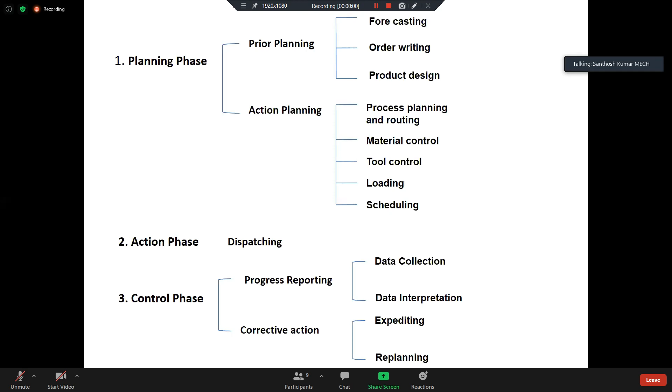In industry or service sector, after forecasting or prior planning, the next stage is action. After planning, we go for action based upon planning schedules. How action planning starts, how it's going, how we monitor it, and how schedules proceed as per the work - all those things we see in action plan. In that process, planning and routing after starting, work is allocated to particular departments, and we check if it's cyclically moving properly or not. In routing stage, we see material control based upon material movement according to department requirements - whether material is moving properly or not. All those things we see in control stage, along with tool control, loading, scheduling, and it works accordingly according to the action plan.

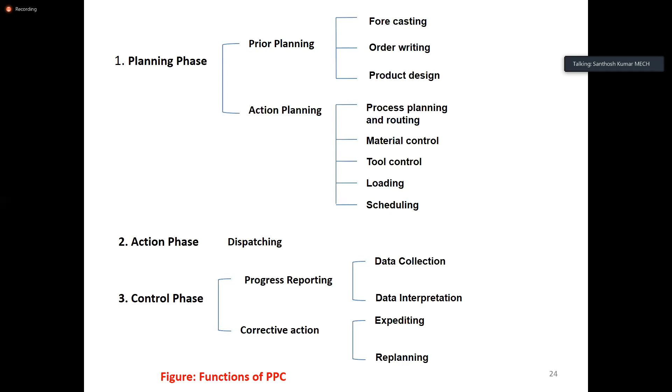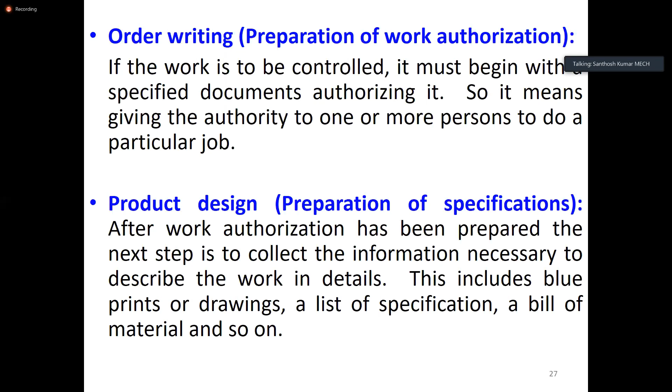Now we'll discuss the second and third phases - action phase and control phase. In action phase, the work is started. There is only one production planning activity in action phase, that is dispatching. The main work starts from here. Till now, whatever we planned, everything is virtual - in the first phase, everything is virtual. It's not exactly starting production, but in action phase, it will start exact manufacturing, either in manufacturing sector or service sector. So proper practical work starts from action plan.

In a nutshell, the only outcome is dispatching - starting from planning to dispatching, whether we are going to deliver a particular product or service to the customer. That is dispatch. So dispatching is the transition from the planning phase to action phase. It consists of actual release of detailed work authorization to the work centers. Once our planning is completed, it goes to higher management.

The planning will be done by different departments. As I discussed in the last class, material procurement department and receiving department - in manufacturing department, again we have different departments, for example if you take any factory.

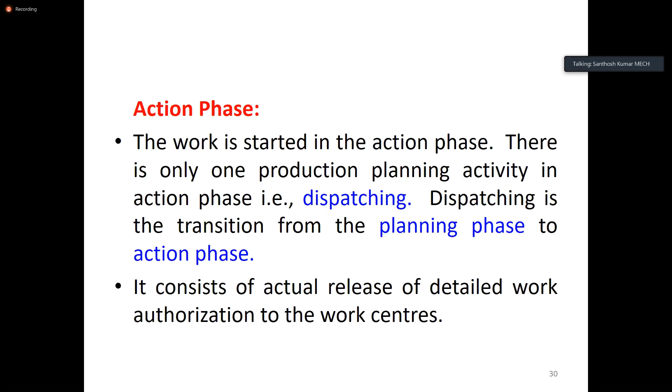In the hierarchy, like factory manager or CEO - chief executive, or sorry, chief operating officer, that's called COO. CEO is different, COO is different. The COO's role is to execute plans according to factory needs. CEO is different - he will be the direct contact to the end customer and factory, that's why he's executive, CEO. So the role here is, CEO is very important when it starts to action phase.

Follow-up or control phase - once the work is started in an activity, it is necessary to continuously evaluate the progress in terms of plan, so the deviation can be detected and corrected as quickly as possible.

When we plan something, we don't think any obstacle will come, we don't do those kinds of calculations - we just calculate according to our methods. So, okay, this fabrication can be done within 6 hours. And for this, they won't generally account for shutdown time or any damage happening - for that I need to keep some extra time. They just simply keep, okay, loading for this job on the machine is 5 minutes, machining can be done within half an hour, and unloading again 5 minutes - total around 40 minutes they will keep. But in the actual situation, it is different. The time will deviate from the predefined manufacturing time.

For example, I started to machine one casting component. The casting department has done the casting, and they give it to me for machining before assembly. Before assembly, I need to do some screws, some small work - like for a fixture. For fixing, we need to keep holes to assemble the screws and nuts. So I need to fix it somewhere. When I'm making some holes, suddenly it gets blow holes. In that case, what do I need to do? I can't suddenly put that material into scrap, because it required so much time for casting and cooling, then machining again, and giving it to my department again.

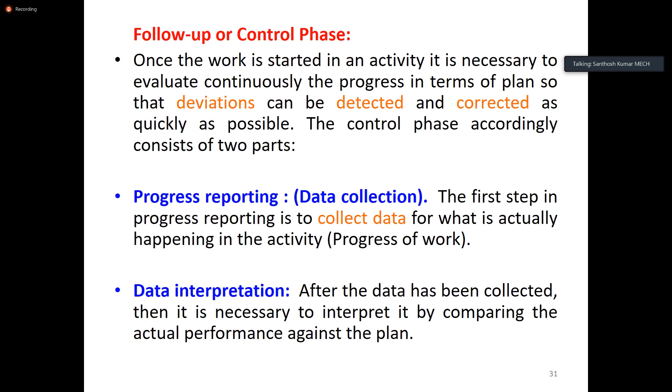So whether my predefined plan, is there any problem going to happen? So that and this one both have to correlate and give complete write up to the hierarchy. Here, the interpretation is very important, and corrective action, expediting. If the data collected from the production unit indicates a significant deviation from the plan and the plan cannot be changed, then some action must be taken to get back on plan.

The same example I'm taking, I already faced in the industry. This casting example I'm taking because I'm a technical buyer in the factory. Few components I need to buy from outside, that is vendor. Vendor means cast, we don't have casting facility, so I need to give that casting for outsourcing. So after receiving that component from outsourcing, I need to give it to machining for assembly.

So the problem is in this expediting stage. So today afternoon to 1 o'clock I planned for a machine, I planned for assembly that casting component which is coming from outside, from vendor. So now the problem is, by 1 o'clock it has to come, 12:30 I received it, but when I started to assemble, I found it is blowhole when I am doing drilling.

So again, the action plan is now - blowhole, there is a deviation. Again, I have to go to design department, I have to request them, sir, I have a very small issue because it is under deviation. We can take acceptance from the design department.

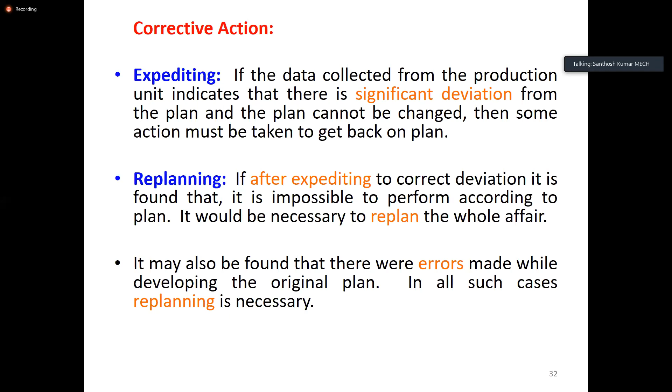So it may also be found that there were errors made while developing the original plan. In all such cases, replanning is necessary. This is already explained, so this is the organization of the PPC department.

A plant manager of manufacturing, generally we call it sometimes plant manager, or above him COO. So under the plant manager, there are different departments - again process engineering, factory production, production planning and control, and plant maintenance.

After that, under production planning control, again different departments - material control, tool control, estimating, routing, scheduling and control, order write-up, dispatching and follow-up. See, this is not exact.

Okay, so whatever I mentioned below, these 6 departments won't exactly be the same in another MNC. I just mentioned here these are possible departments under PPC. So one is material control, next tool control, estimating, routing, scheduling, control, order write-up, and dispatching and follow-up.

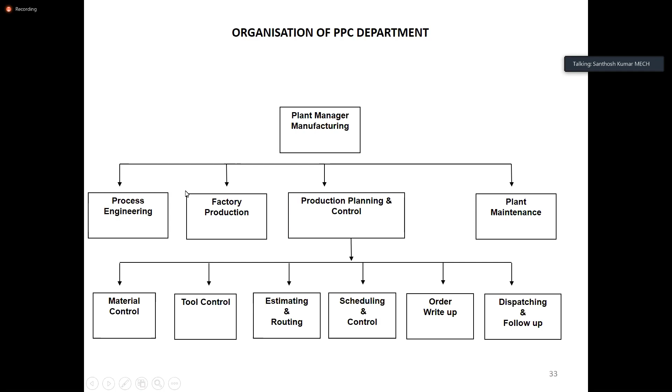These people, that's why they'll keep departments, but generally in small companies they'll keep normal centers or small, like 1 or 2 persons. Okay, so now as of now we discussed the functions of production planning.

Now we'll see type of production or manufacturing system. If you see in any manufacturing sector or production side, there are different types of production. Example, this pen is a different kind of manufacturing process, and mouse is different, or mobile is different, or notes is different, laptop is different production system. So but how to understand which product comes under what production process? Based upon the product only, the manufacturing system is developed in the companies.

So the mode of manufacture which may affect production planning and control system includes three main relevant factors. One is the type of production, quantities of finished products, and regularity of manufacturing. See, this pen manufacturing unit will be different, and Rolls-Royce car manufacturing unit is different.

So this one, if you set up one line assembly, line assembly means it is fixed. Initially you need polymer, I need to heat it. The next one is heater. The next one is for blowing, and next one is injection molding, and finally curing, and again packing, dispatch. This is the one line assembly.

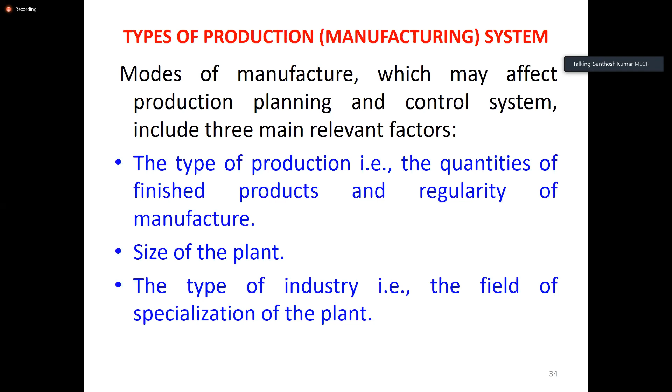And one more factor is size of the plant. As I said, to manufacture this kind of pen, this area of 200 square yards is enough. But if you want to make big components or big products, you need to have a very big plant. Where I work, that is around 250 acres. So the type of industry, the field of specialization of the plant, are another factors.

The types of production system can be broadly grouped into three headings according to the volume of production and the regularity of manufacturing. These three are very, very important: job production, batch production, continuous production.

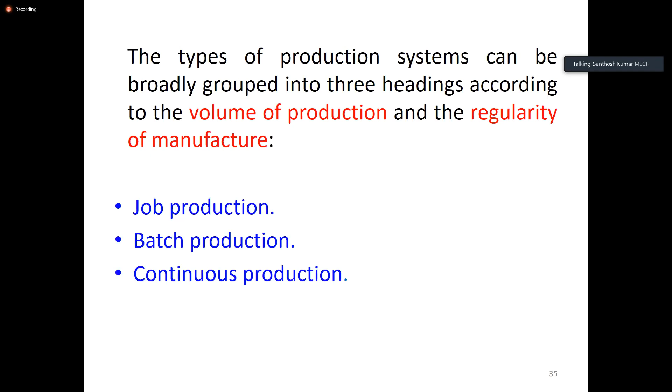If somebody wants to work in the product core side, mechanical core side, they should understand these three very well, because whether maintenance engineer or design engineer, these three keywords they should know very well. If you are going to work in any job production company, you will be completely allocating your mind to one process, like you should be a professional in that area. We'll see examples so you will understand all these three very clearly. These keywords and understanding of them is very important.

Job order production is the manufacture of products to meet specific customer requirements or special orders. The quantity involved is small. The example for this: Rolls-Royce, Lamborghini, why I'm telling this, high-end cars or high-end motors or high-end customized motors having different capacity needs.

I need to pull so much water from a very depth area, and I have to pull it up. This efficiency needed is more. Some other places like Uttarakhand, their water level is different, and here the water level is different. Similarly, when I'm working in my company, I receive every month around 20 different motor requirements. All the requirements are different, I can't see any single motor as same. Similarly, the cars, Rolls-Royce or whatever.

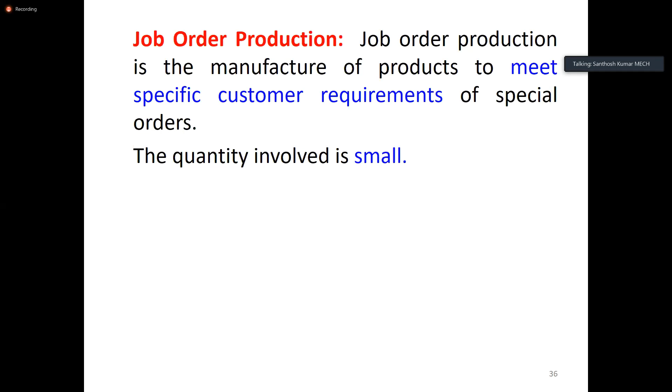Example, turbo generators, large engines, material handling systems, shipbuilding, and many other manufacturing activities, as we have seen in Visakhapatnam, Vikrant, all these submarines. This is customized. Indian Navy needs some submarine, they will order and they will get it done. But the same kind of ship or submarine cannot be repeated. They won't find again a similar kind of requirement from Indian Navy. Again after 2-3 years, again different requirement submarines they need, and again the process is different. So this is customer-based job.

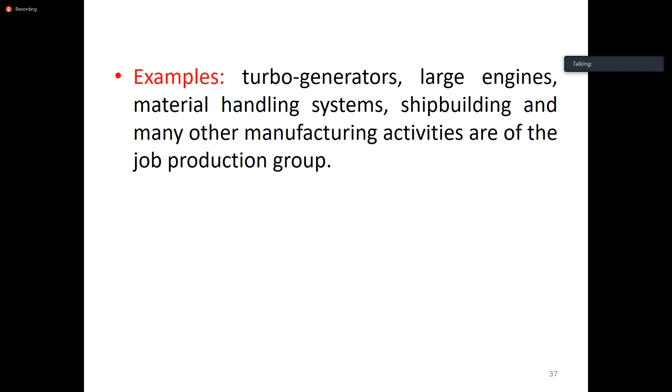When the order is to be executed only once, there is little scope for improvement of production techniques by employing costly method studies, research, special tools, or jigs and fixtures.

If you want to optimize some process, few engineers generally get hired by companies. I've seen many IIT and NIT graduates join big MNCs, especially job production companies. After a year or two, they try to shift companies or move to research areas because they have a curiosity to implement what they studied in industry. But the problem is there's little scope for improvement in those companies, so most try to shift to another manufacturing production company where there's huge scope to redesign a sub-part, change it, or optimize some process. These possibilities exist in other manufacturing processes, but especially in job production, it's very limited.

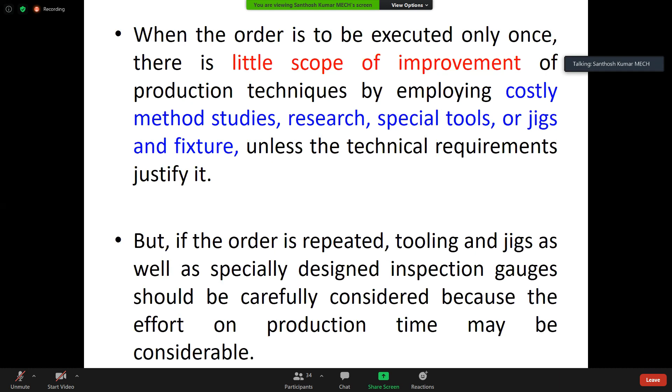So how much are you going to save on cost when making a fixture? Is there any other way in the manufacturing process? I cannot allow this fixture or jig cost to load onto my product, because it finally affects the product's final cost.

In this type of production, products are made when orders are received from customers. One order may be altogether different from another, as I already mentioned, so prior planning becomes complex. For this, you won't find overall annual planning, but project-wise planning can be done.

Skilled labor is necessary to handle a variety of jobs. For example, if I want to present a company, say a small software company with 2-3 guys, if he knows only Python or Java, two programs aren't enough now. Based on the present trend, we should know infographics, and also Python, Java, and Azure, whatever Microsoft is giving. So whatever is useful for the customer, he should know at least 2-3 extra useful software.

That skilled labor is very, very important for this company, because we don't know whether this month we might receive a Java project, or next month we'll receive a Python project, we don't know.

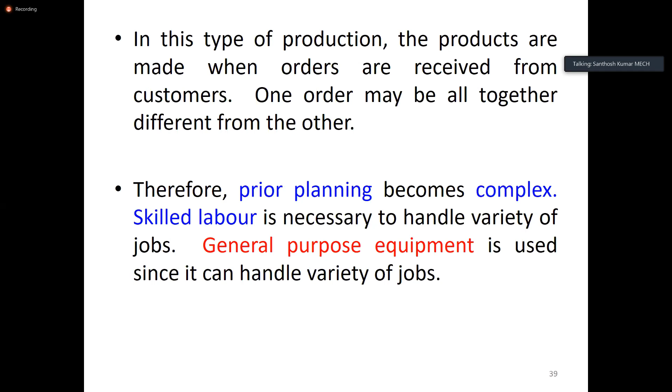Every time I can't hire one worker or one software employee every month. So at least if I have a person with programming expertise, if he has skill in that area, I can handle this job work. So general purpose equipment is used since it can be handled for a variety of jobs.

The output of the shop in job production is mainly governed by plant capacity, and as soon as the load presented by incoming customer orders exceeds this output, a queue of orders is formed. When immediate increase in plant capacity is impracticable, the length of the queue is a major factor governing the sales policy of such plant, and a certain amount of discrimination in order selection may be essential.

Take Apple, or any brand company - what do they think about customers? So I release the product now, maybe Apple 12 or 13. Obviously, the orders coming from different customers, the queue is increasing in terms of orders.

Even though you are maintaining the brand, that's why most companies now - Flipkart, Nokia, Jio or some mobiles or products - what they will do is take estimation orders. For example, next month I am going to release this product. So how many are interested? Most of them will send their requirement. Based upon that, they will start the production facility, and once it is reached, they will release and sell. Again, they will take one month for taking orders.

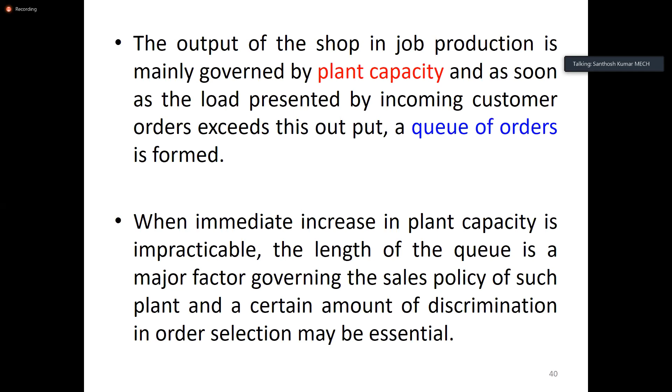Characteristics of job order production: small production runs. Job order production is characterized by the manufacture of one or a few numbers of a single product, designed and manufactured strictly to the customer's specification. The flow of materials and components between different stages of manufacture is highly discontinuous due to imbalanced operation-wise work content. So as I said, this is not line-balanced production.

So we may face some problem here - immediately we have to stop a fabrication stage. So whatever the preceding location, like machining, that can be used for another product or other manufacturing process. So this is not flow.

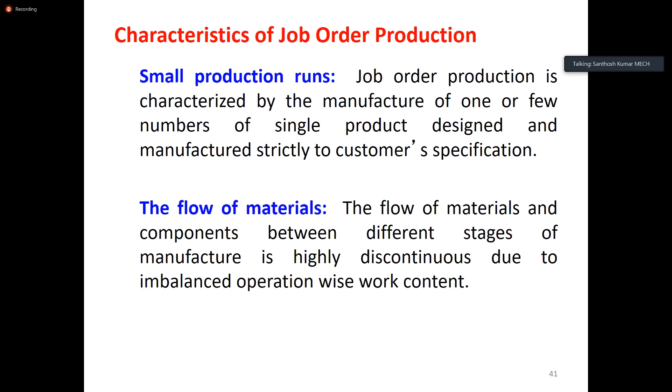Manufacturing cycle time: relatively long delays occur at the assembly as well as at the material processing stage due to lack of materials or components, imbalanced workflow, design changes, design errors detected during manufacturing, etc. As I informed earlier, if any problem happens in the batch production system, you have to wait until the component comes from outside or is manufactured from inside.

One situation I want to tell - in November end, we generally had an average production of 20. Immediately we received 40. So with those huge orders, we started very fast manufacturing, and in that we missed one component that can only be done by casting, a very big component. The problem is, at that time we missed ordering that component, and the assembly requested it. Immediately we understood that we had missed it.

So we asked the inside manufacturing department to fabricate from the steel plate or iron plate and do the machining. So instead of putting it for casting, I had to spend around 4 times more for this inside manufacturing process, like fabrication and machining. Until that was done, I had to stop my final assembly, because after final assembly the customer ticket is everything booked. So I had to inform him, let's wait some time. So these kinds of issues happen in batch production.

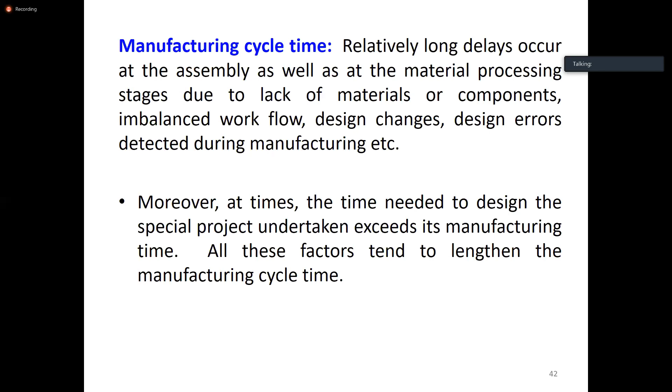These are arranged according to the process layout because the operations and their sequence change from product to product. As I informed, in 40 projects, 40 motors, each product design is different and for different customers. So you won't find any same product in those 40 motors.

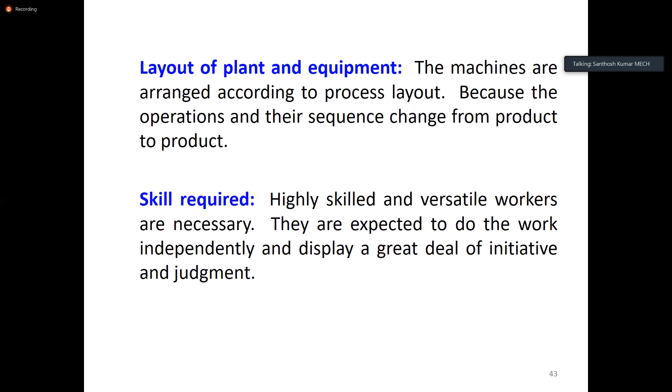The skill required - highly skilled and versatile workers are necessary. They are expected to work independently and display a great deal of initiative and judgment. That's why in most batch production companies, if you ask any certified welder's salary, you'll see it is equal to a software engineer's salary, around 35 to 40,000, because he is very skilled - whatever design comes, he will mold accordingly and manufacture, do the welding. So a certified welder plays a major role in the manufacturing sector because it's very highly skilled labor.

Next one is batch production. Till now we discussed about job production, now we'll see batch production. Batch production is the manufacture of a number of similar articles, either to meet a specific order or to satisfy continuous demand. When the production of the batch is terminated, the plant and equipment are available for production of similar or other products.

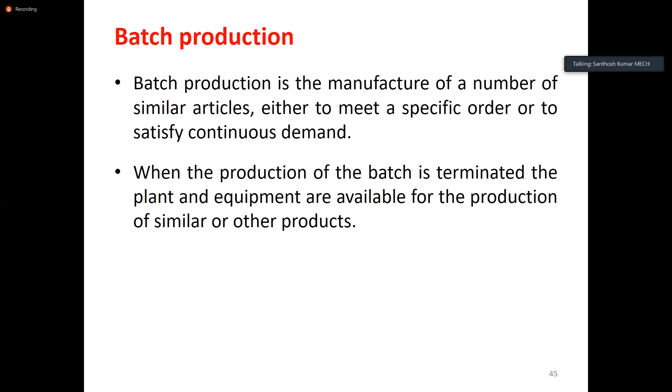So previously we won't find similar products, but here we can see similar articles or products in batch production. The characteristics of batch production: short runs.

Batch production is characterized by short production runs and frequent changes in setups. And investment is also very high, because if I want to make any product, I have such a big shop floor and I need to have this.

The best example for this is a steel plant, Vizag steel plant. You can see that to make steel sheets or rods of different diameters and lengths, you can find these. But the input is obviously one ingot.

When I visited Vizag plant, if I want to see the plant, it means from raw material, the iron ingot, to the final end product, what is happening and what their manufacturing end product is. If I want to see that complete line, I have to walk around 3 to 3.5 kilometers on average.

So this complete line I have to manage, because to manage this, different conveyors are needed, different access is needed, different sensors are needed. So the investment is huge. This is the best example for that.

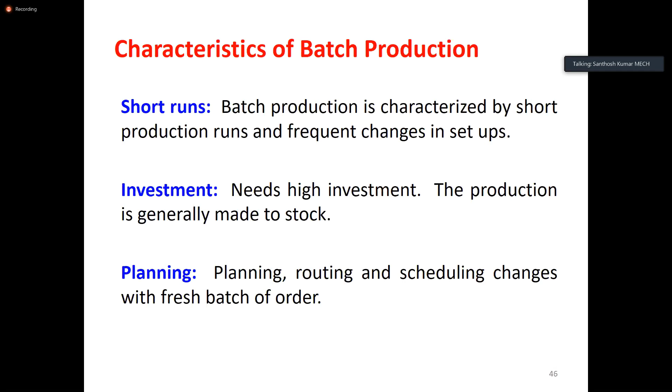Planning, routing and scheduling changes with each fresh batch of order. Skill of labor: skilled labor capable of handling a variety of jobs is required.

Here, if any maintenance engineer is there, he's not only an expert in understanding how my conveyor is working, no. He has to understand the conveyor system, the material handling system, because he is working in such a batch production setup. He has to see everything as a maintenance engineer.

The quality of supervision: the supervisors need considerable knowledge of the specific process. The amount of supervision required in batch production is lower than in job order production.

Previously, if I am making some machining or other process and something goes wrong, I have to wait again - if it's small components, 1 day, if it's big components, 2 to 3 days - until that, the next preceding department has to wait.

But here, if something goes wrong in the conveyor system, they'll replace it immediately with procured and arranged equipment to obtain flexibility.

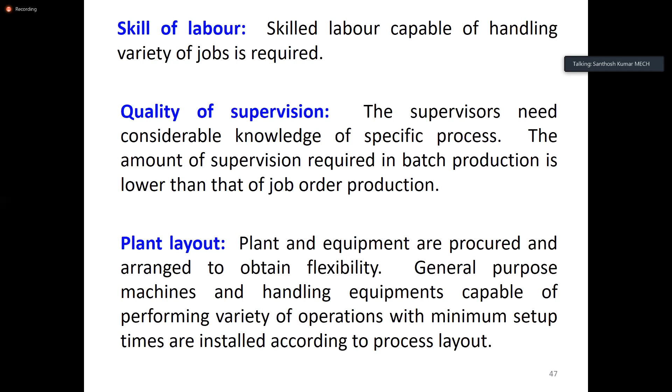General purpose machines and handling equipment capable of performing a variety of operations with minimum setup times are installed according to process layout. Material handling in batch production is less compared to job order production, because in this line you won't find much.

Replacements give flexibility in production schedules. Disruption due to machine breakdown or absenteeism does not seriously affect production, as another machine can be used or another operator from another machine can be shifted.

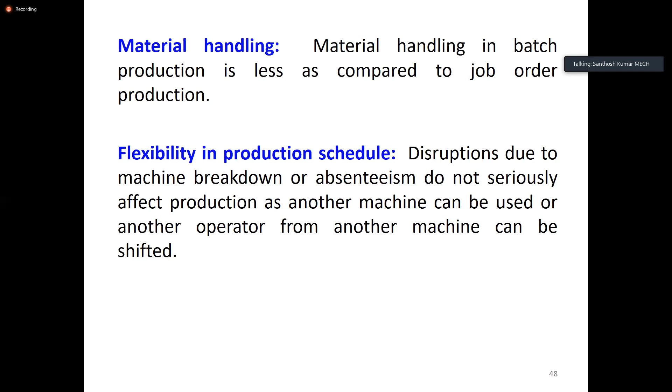There are different maintenance situations - if a machining person is not coming that day, maybe they have another person to engage in their jobs. Here you won't need high skill - yes, they need skilled labor, but it's not high.

Next one is continuous production. We'll take extra 8 minutes. I will close exactly at 2 o'clock because I started at 1:10. Is it okay? Yes sir, okay, okay sir.

Continuous production is the specialized manufacture of identical articles in which the equipment is fully engaged. Continuous production is normally associated with large quantities and high rate demand. Large quantities - you see mobiles, brushes, or toothpaste, these kinds of huge quantities, and high rate demand.

Yes, obviously they need it more, so there are many customers for these products. Since identical articles are produced, the operations are repetitive.

Production of auxiliary aids such as special tools, jigs and fixtures, material handling systems, and inspection devices can be used advantageously. If you make a jig and fixture with this advantage, it will be long lasting until it gets damaged, because it can last at least maybe 10 years.

If you see any paste or brushes, I'm seeing that brush company for more than 20 years - the design is the same, everything, only the color is changing.

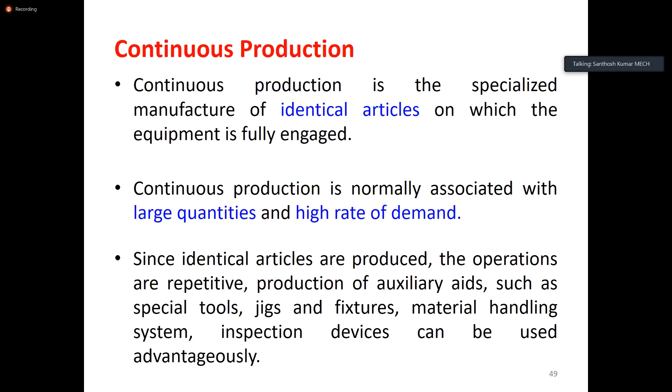The continuous production can be classified into two types: one is mass production and flow production. In mass production, a large number of identical articles are produced, but in spite of advanced mechanization and tooling, the equipment need not be specially designed for this type of article only.

Both plant and equipment are flexible enough to produce other products involving the same production process. If management decides a certain line should be discontinued, the machinery can be switched over to produce another article. Such a change in policy usually does not involve a major modification in plant layout, but a change in tooling may be quite possible.

Around 50,000 to 1 lakh lathe machine entrepreneurs will be there. All these people are vendors for the MNCs. If you go to that area, in that shop, they will always make the same product - a simple product. For example, pen manufacturing - they will make caps on the lathe machine, around 1 lakh of them, and supply to that company.

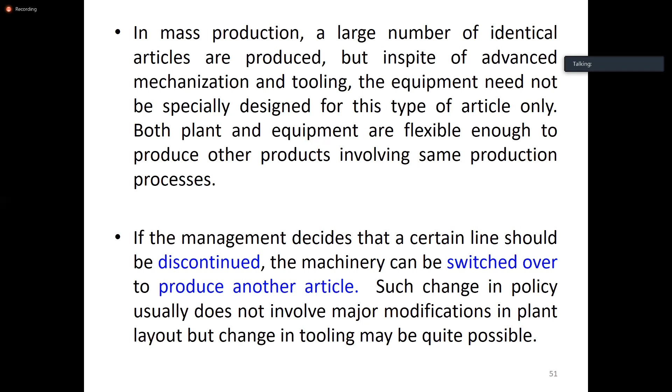So in flow production, the plant machinery and layout are primarily designed to manufacture a particular product. Flexibility in selection of products for manufacture is confined to minor modifications in layout or design of models. Notable examples are automobiles, engines, household machinery, chemical plants.

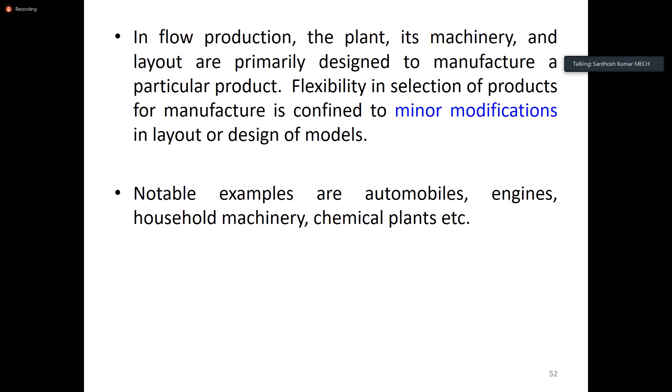Okay, now I am a small manufacturer for a TVS company. Initially I used to make one component. Now suddenly I receive some changes, so for that I need to change my layout of plant based upon the design. This is flow production.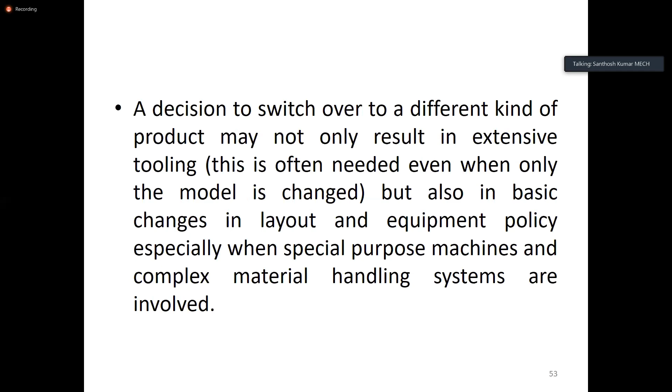So a decision to switch over to a different kind of product may not only result in extensive tooling, but also basic change in layout and equipment policy, especially when special purpose machines and complex material handling systems are involved.

So characteristics of mass and flow production: flow of material. The flow of material is continuous and there is little to no queuing at any stage of processing. There is no queue here.

The machines and plant layout: special purpose machines are used, and plant and assembly stages are laid out on the basis of product layout.

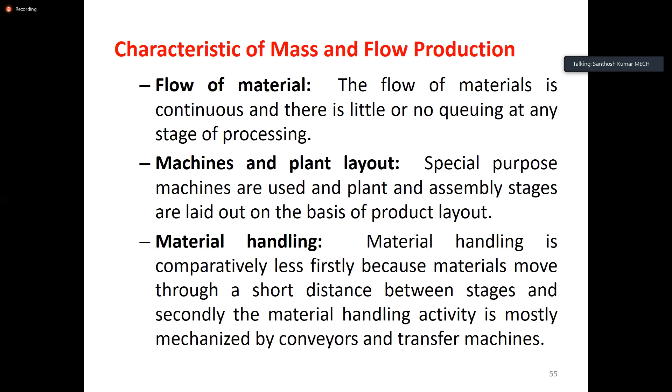The material handling is comparatively less, firstly because materials move through a short distance between stages, and secondly, the material handling activity is mostly mechanized by conveyors and transfers. Once you start this production, it will give end product continuously as per the programming.

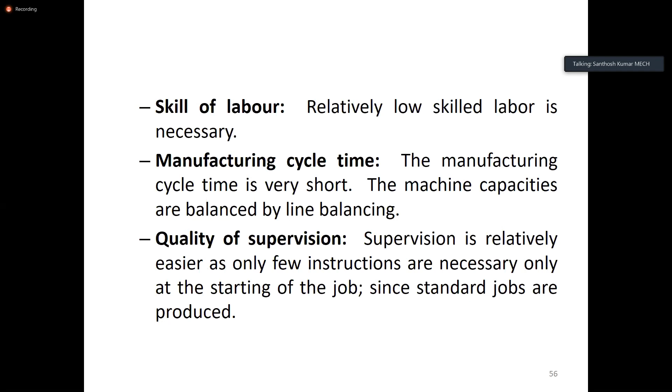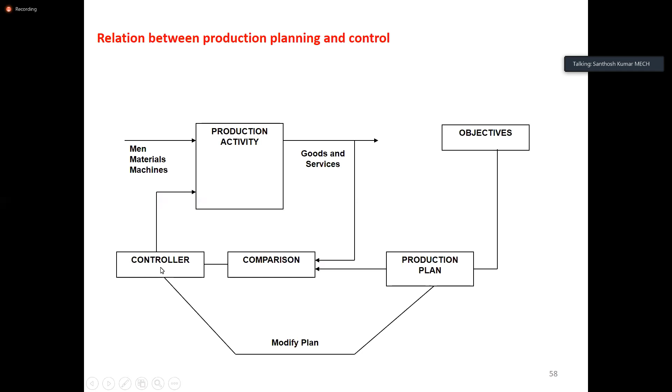So this is the relation between production planning control. The men, materials and machines are the input to production activity, and the input goes to the objective of what I'm going to manufacture. Based upon the production plan, it will go with the goods and services. The input and output will get compared - goods and services versus production plan - to check whether it is going accordingly or not. If any changes are needed, modify the plan, and it goes to the controller. This MRP control will be there, one person who will check all those things, whether my production is running properly as per the production plan.

So only one small topic I have to check, only one thing is left. Except that, we have finished the basics, everything, and how it is running. The entire thing we have discussed in the first unit, so possibly we'll start the second unit. If anything is left over, I will explain it next class in 10 minutes, and the remaining 40 minutes we'll go for the second unit. You have any doubts?

No, sir. Or are you feeling bored?

I'm explaining with my practical experience so that you will understand when answering or when you go to any industries. Just keep this PPT because it will be useful, because I kept my textbook when I was working in a company, and there I had to apply just-in-time and other methods based upon that. You will understand similarly after 2-3 years. So if you have any doubts, you can send me a mail. I'll share this PPT soon.

Excuse me sir, tell me. Sir, can you please include pictorial representation as well as any videos in between, or links, so that we can understand better? Today we discussed regarding shop floor, batch, and continuous production, but if we view any video or go through any picture, we will have some more clarity compared to listening to the whole lecture as well as reading the lines. That's why I'm requesting to keep some pictures or share some links. Sure, correct, in future I will add those things also in next topics that I already planned. But here, that's why I'm telling my practical examples, how it will be useful. So when you are listening to those examples, in future anyway I will add those kind of things. Okay sir, thank you.